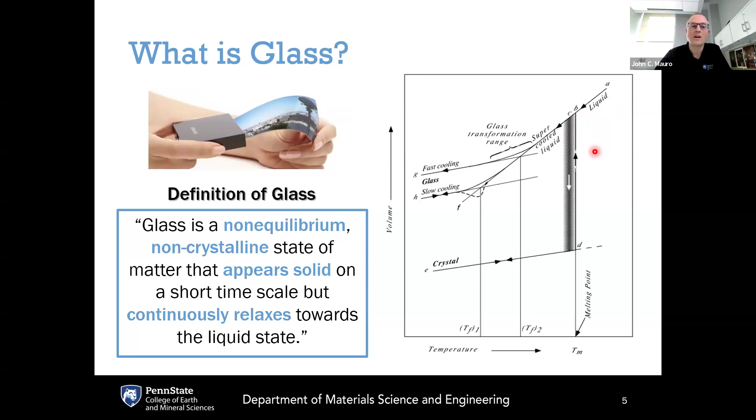In principle, any liquid could form a glass if you cool it fast enough to avoid crystallization. That's really the key thing.

When we think about typical glass products and their strengths, they range by orders of magnitude. Common glass products like glass jars have typical practical strengths on the order of 14 to 70 megapascals. Freshly drawn glass rods can be higher, 70 to 140 megapascals, but if they're abraded, their strength immediately goes down to about 14 to 35 megapascal. Armored glass can be up to several hundred megapascals, and glass fibers even higher. A freshly drawn glass fiber can be as high as 2 gigapascals.

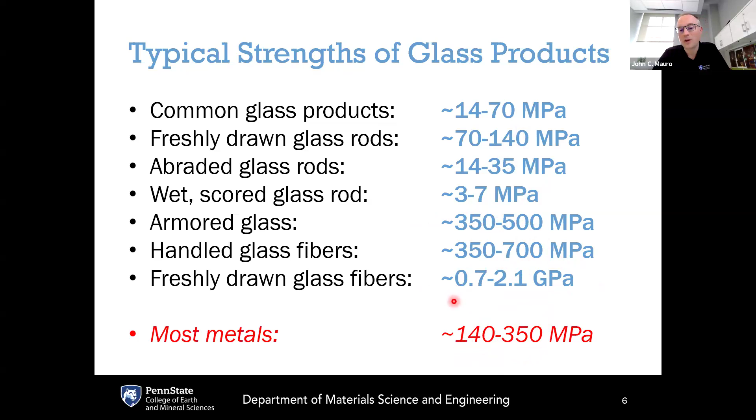If we compare these ranges to typical metals, which are on the order of 140 to 350 megapascals, glass is actually capable of being quite a bit stronger than most metals, but at the same time many of the glasses we commonly observe are actually weaker than many metals. The reason for this is the existence of flaws.

Going back to the original derivation by Orowan of the theoretical strength of a perfect brittle material like glass, this calculation is done based on not having any flaws and just calculating how much energy it would take to break bonds to form new fracture surfaces. If you put in typical values for a silicate glass, the theoretical strength of this perfect brittle solid would be about 35 gigapascals, much higher than what is observed even for freshly drawn glass fiber.

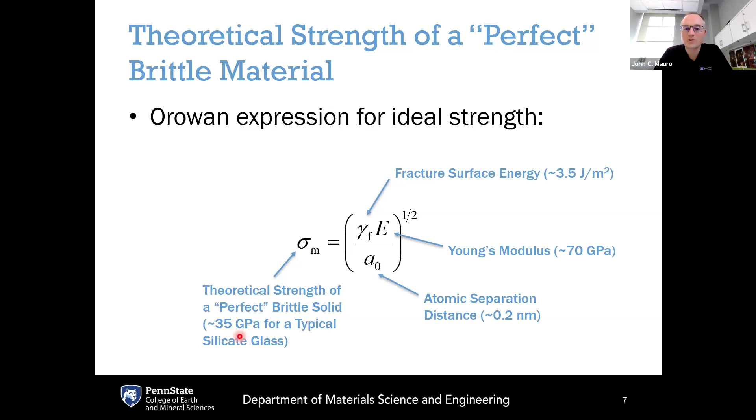What compromises the strength of glass is the presence of flaws. These can be flaws due to the manufacturing process, but more commonly they are flaws due to the handling of the glass products.

The original theory for incorporating flaws into the strength of a brittle material was done by Inglis. He considered what happens if there's an elliptical shaped flaw in the interior of the brittle material — for example, an elliptical flaw with certain dimensions, placed in uniaxial tension with an applied force. Inglis calculated how much this would compromise the strength.

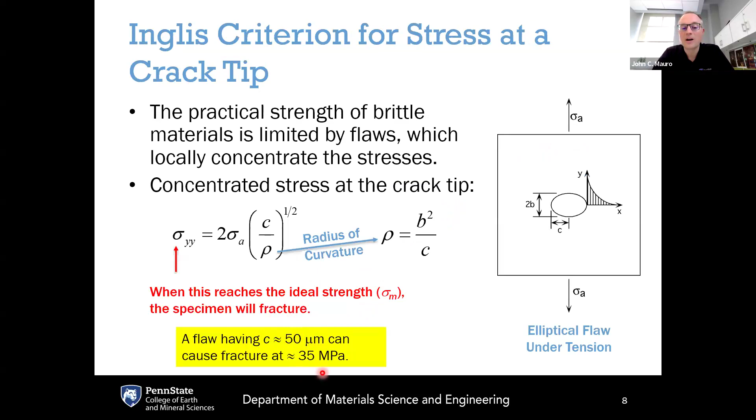If you take a perfect brittle solid with an ideal strength on the order of 35 gigapascals and introduce a flaw on the order of 50 microns, this can actually lead to fracture at a dramatically reduced strength of about 35 megapascals.

The more common way of thinking about the reduction of strength of brittle materials is due to Griffith, because Griffith introduced the presence of surface flaws. Surfaces of glasses or other brittle materials are what get exposed to the environment — this is where we touch the glass, and this is where it tends to undergo the greatest amount of damage.

With Griffith's analysis, he based it on the length of the crack as well as the sharpness of the crack tip — this appears in the denominator as the square root of pi times c star, where c star is the critical crack length needed to induce fracture in a material.

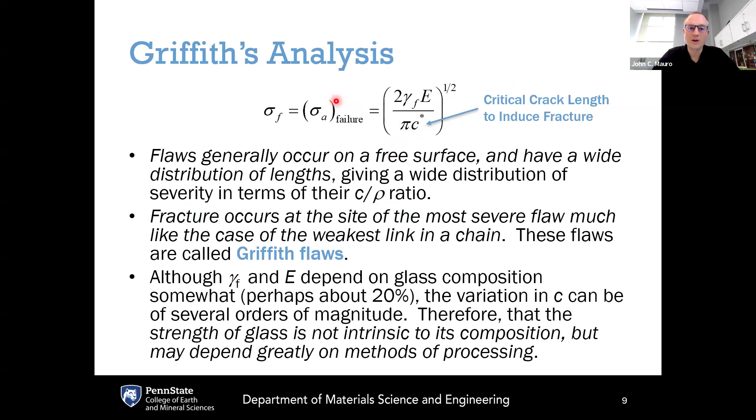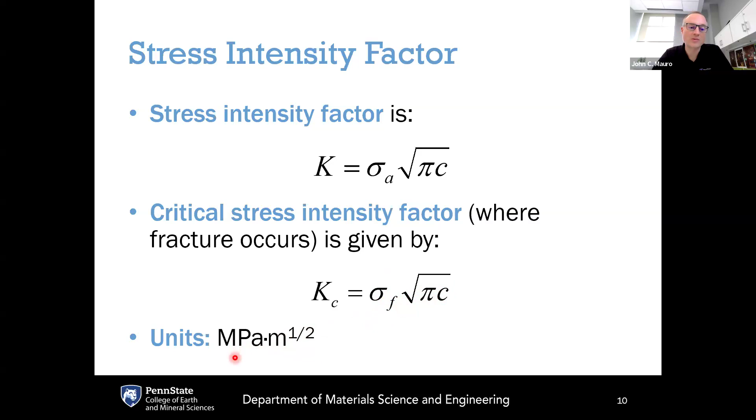If you take this square root of pi times c star and multiply it by the applied stress, you get what's called the stress intensity factor, K, introduced by Griffith. The critical stress intensity factor, denoted K sub C, is where fracture occurs, given by the stress at fracture, sigma sub F, times the square root of pi C, where C is the length of the surface flaw. The stress intensity factor has units of stress times the square root of distance, typically expressed as megapascals times square root of meters.

The failure of the glass or brittle material can occur in different modes.

Traditionally, there are three different modes that are defined. The so-called mode 1, or opening mode, is when you have a flaw as shown here and place this under uniaxial tension, opening the crack. When mode 1 failure occurs, there is a subscript of Roman numeral 1, so this is K1. There's also K2, due to mode 2 failure, which is a sliding mode.

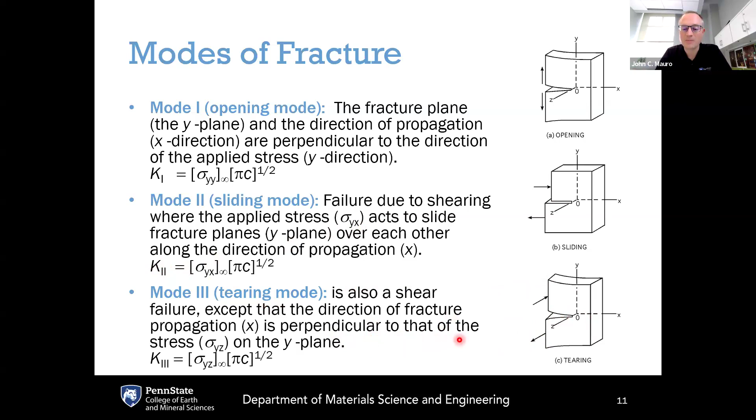This occurs if you place the material under shear, parallel with the plane formed by the fracture surface, resulting in mode 2 or sliding mode failure. In that case, the stress intensity factor has the subscript 2. There's also mode 3, tearing mode, shown in the lower right, where shear acts in a direction perpendicular to that of the stress on the plane. So we can have mode 1, mode 2, and mode 3 failure.

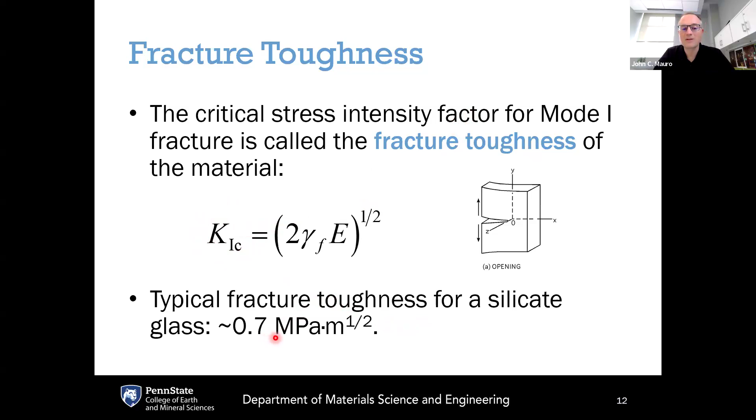What you most commonly see is K1C, the critical stress intensity factor under mode 1 of failure. This is more commonly known as the fracture toughness of the material. So if you see toughness quoted, that is K1C. For typical silicate glasses, fracture toughness is on the order of 0.7 megapascals times the square root of meters. A few other things to keep in mind for the mechanical properties of glasses, especially under many years of operation, is stress-assisted corrosion, or slow crack growth.

For silicate glasses, this is governed by interaction between water molecules from the environment and the crack tip itself. Water molecules can come in from rain or humidity. They enter the tip of the crack, which is under stress, and react with the silicate molecules at the crack tip. When a water molecule interacts with silica, it breaks one of the bonds, and the crack becomes one molecular unit longer. Over time, water can propagate to the crack tips, react with them, and continue to lengthen them.

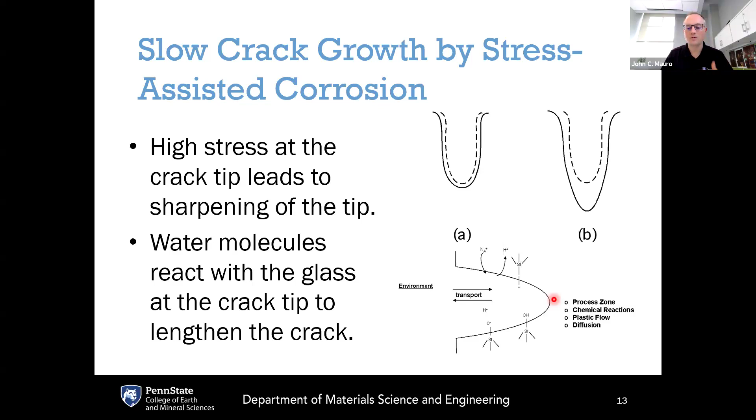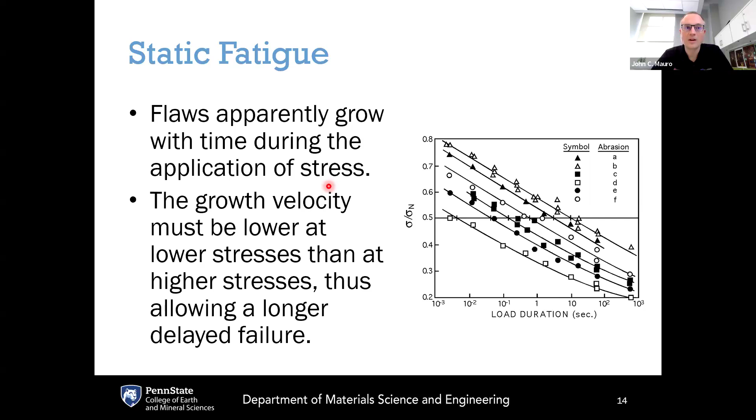This, over time, will compromise the strength of glass products. If this occurs while the glass is under constant stress or constant loading conditions, this is called static fatigue, where flaws grow over time due to application of stress. Over time, the strength of the material is compromised because of the reaction with water and the progressively lengthened crack tip.

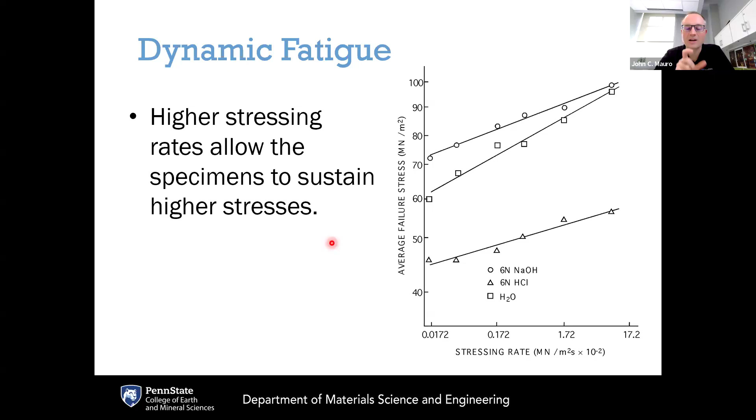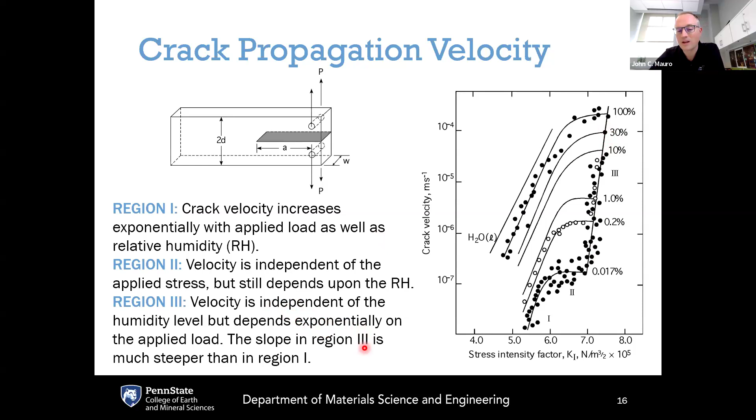Once the crack is long enough, we get to region 3, where there's a very sharp increase in crack velocity with stress intensity factor. At this point, the stress intensity factor is high enough that it doesn't need water molecules anymore to grow the crack. So the velocity is independent of humidity level, but still depends exponentially on the applied load, and at that point, that's where you generally have complete failure of the material.

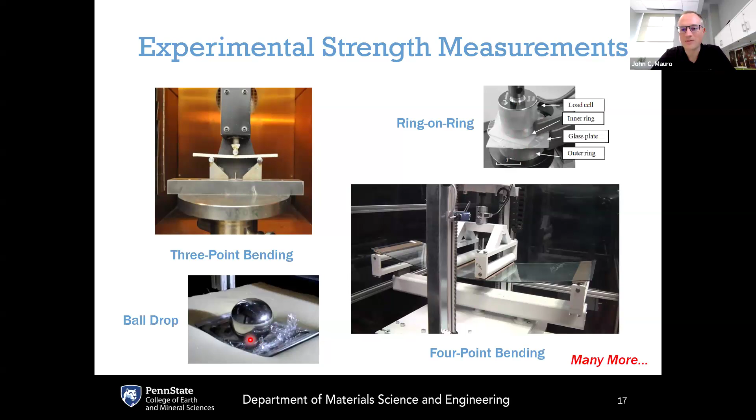There may be other specific tests to align with certain specific applications, but these are some of the common tests that are done. So now that we know that glasses fail due to brittle fracture, we know that it's governed by the distribution of the sizes of the cracks, and we know that the strength of glasses can be compromised by the reaction with water.

How can we actually improve the glass strength and toughness? There are several different ways to do that. One is to reduce the severity of the flaws. So how do we reduce the stress intensity factor K1? Another way would be having a coating to reduce the risk of surface damage, aiming to reduce the crack length, C.

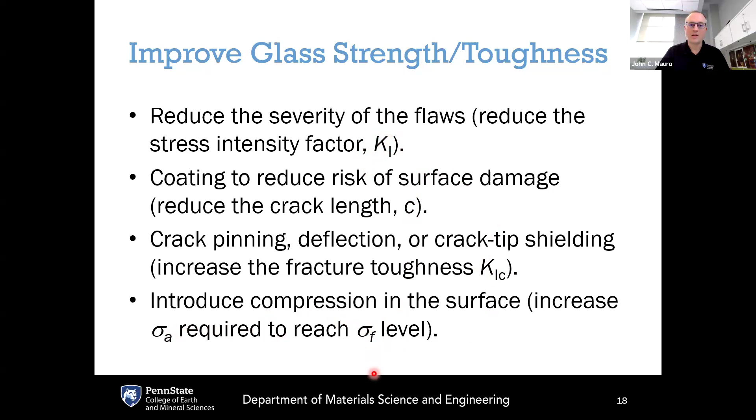Another would be, how could we increase the fracture toughness? How could we increase the K1C of the material by crack pinning, deflection, or crack tip shielding? Or could we introduce some sort of compressive stress at the surface to increase the applied stress that's required to reach the sigma F level? So in other words, could we reduce K1, increase K1C, reduce C, or increase sigma F? All of these are pathways to improving the mechanical performance of the glass. How do we actually do that?

One common way is thermal tempering. Thermal tempering is where you take thick, flat pieces of glass, subject it to fast cooling where you can freeze in the exterior surfaces of the glass faster than the interior part of the glass. This pulls the exterior into compression. This has the advantage that it's fast. You get really thick compressive stress layers, but you really can't do this with thin glass, and you can't do it with complex shapes, and it also requires glass with a high thermal expansion coefficient, like soda-lime silicate glass.

Chemical tempering or ion exchange has a number of advantages. This can be done on thin glass, like this is what's used in all your cell phone glass. It can be used for complex shapes. You can get much higher compressive stresses compared to thermal tempering. The disadvantage is that it's a slow process, and that means it's an expensive process. It takes on the order of 8 to 10 hours.

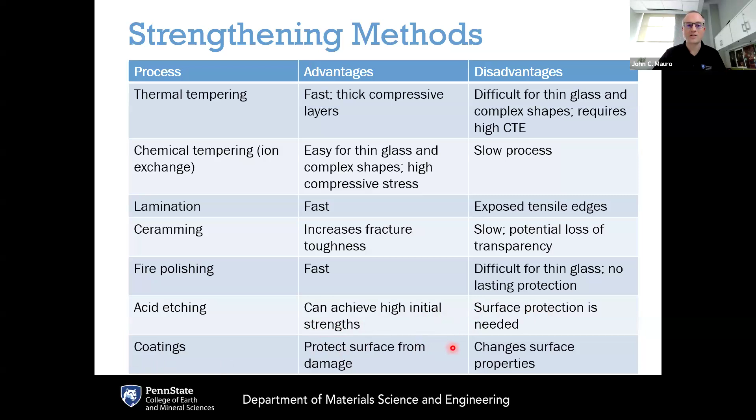Lamination can also be used. Ceramming is another pathway where you could turn the glass into glass ceramic to increase the fracture toughness, but you can compromise some of the optical properties that way. Fire polishing is a fast way to help reduce the severity of flaws on the surface, but it doesn't provide any additional lasting protection after that. Likewise, acid etching can reduce the severity of flaws, at least initially, but there's no protection later on. Coatings can also be used to provide longer-term protection, but that could also compromise some of the surface properties and the optical properties of the material.

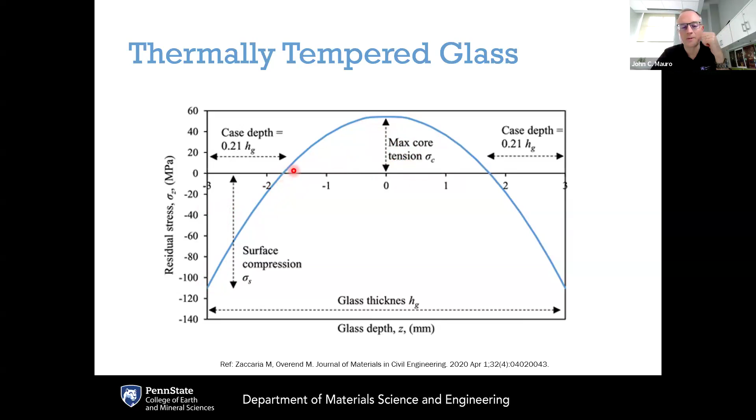Basically, you're safe as long as the cracks do not penetrate through the compressive layer to get through this depth of layer and into the tensile layer. You can have glass fracture following different patterns depending upon stresses that get released. If you have a non-tempered glass like an annealed glass, the cracks will propagate out in straight lines. So this is all the energy because of the initial impact, but the glass is not releasing any more tensile energy, and so you don't get any branching after the initial impact.

With tempered glass, on the other hand, if the crack penetrates through this depth of layer and into this tensile regime, now the glass wants to release all of this tensile energy. The tensile energy release causes the crack to accelerate until it hits the terminal velocity, which is governed by the speed of sound in the glass. At that point, it still wants to release energy at a faster rate, but it's unable to travel any faster. So the way to do that is to bifurcate the crack, so one crack splits into two cracks.

They continue to release the tensile energy, continue to accelerate until they reach their terminal velocity, and then they will branch again. As a result, the pattern that you get from tempered glass failure is these very small shards, and this is what's called frangibility. This is because of the release of tensile energy.

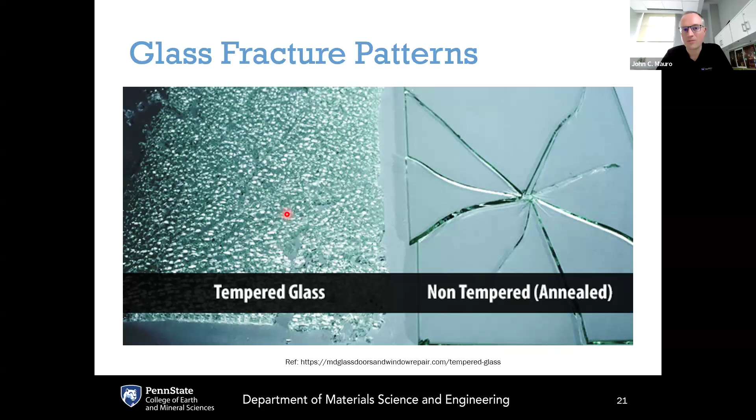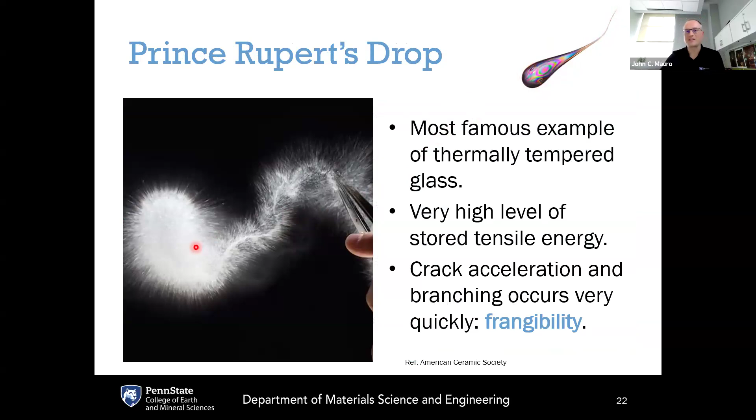The most famous example of this is the Prince Rupert's drop. This is an extreme example of thermal tempering, where it's extremely strong in the main part, but if you clip the tail, this will basically go into dust upon fracture because of the very high levels of tensile energy.

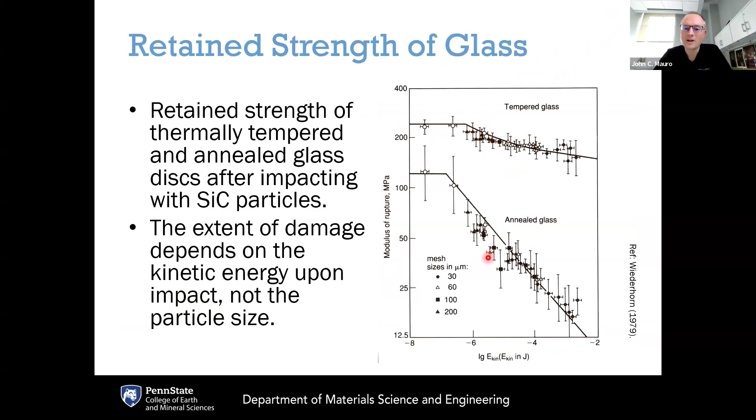Tempered glass is very effective at improving the practical strength of glass. This shows the practical strength of tempered glass versus annealed glass, where you can see some major advantages.

Very quickly, another approach for improving the strength is through laminated glass. The most common way of doing this would be like in an automotive windshield, where you've got a polymer layer in between two glass layers.

But another common way is actually a glass laminate. You probably have some of these dishes at home, these Corelle dishes. These are just laminated glasses. There's an interior glass, which is white, and this is coated by a very thin, clear glass layer. What gives these dishes their strength is the difference in the thermal expansion coefficient between the outer layer and the inner layer. This can also be done in flat glass forms.

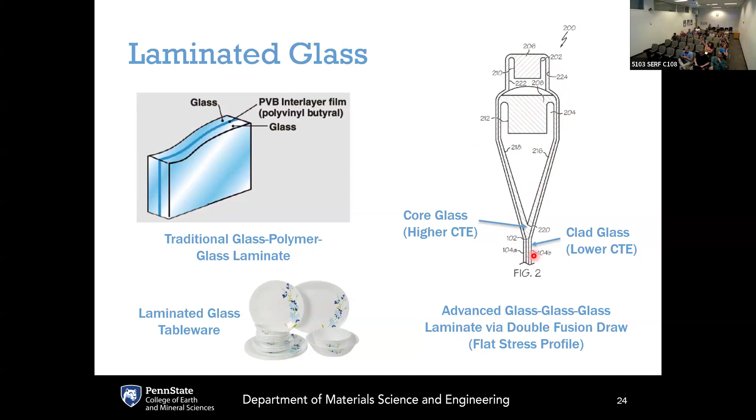In fact, one of the projects I worked on for a number of years at Corning was this double fusion draw process, where you've got one glass that's being melted up above, another glass down below. The upper glass flows over the inner glass, and what you get is a 3-layer laminate at the bottom that automatically gives you strengthening based on the differential in the CTEs between the clad glass and the core glass.

Toughening due to glass ceramics is basically growing crystals in order to deflect cracks. This is a very effective way to improve fracture toughness. This is what makes Corningware work, for example.

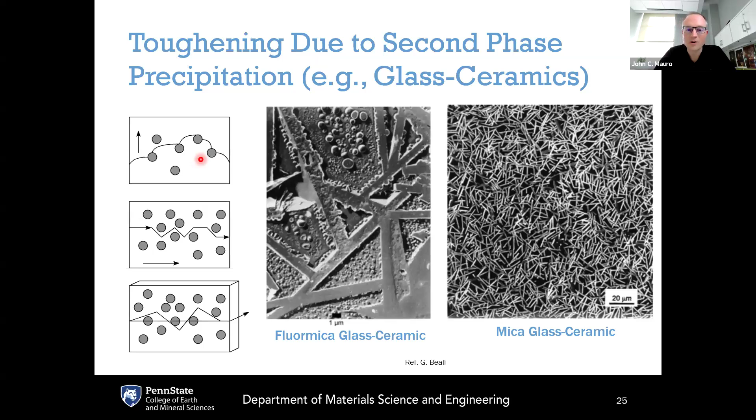And of course, we have ion exchange. Ion exchange gives you the highest level of compressive stress. This involves taking the glass, submerging it in a molten salt bath at a temperature of about 400 degrees C. What happens is that the smaller ions from the glass, like sodium, will diffuse out into the salt bath. They get replaced by larger ions like potassium from the salt bath.

The larger ions want to expand the glass surface, but they're unable to because the interior of the glass is keeping them within a certain geometry. So this concentration profile of potassium gets converted into a strain profile, which gets converted into a stress profile. This gives stresses on the order of about 1 gigapascal, much higher than thermal tempering.

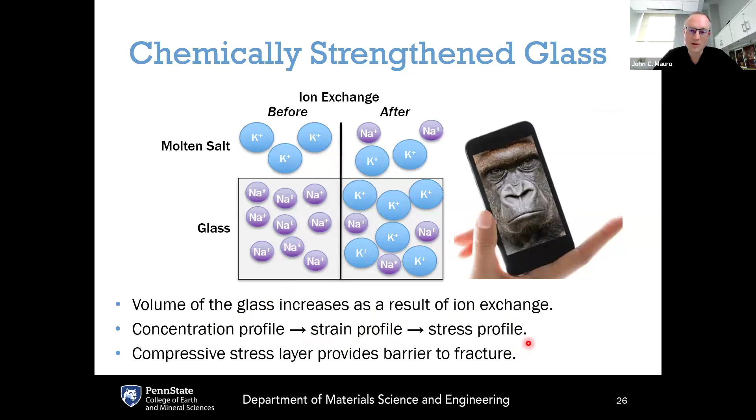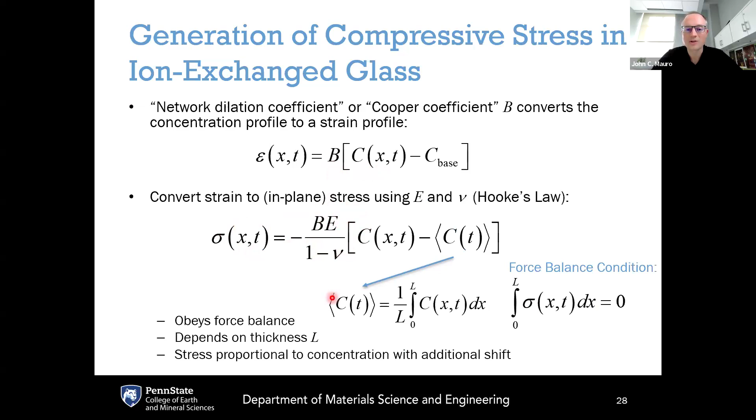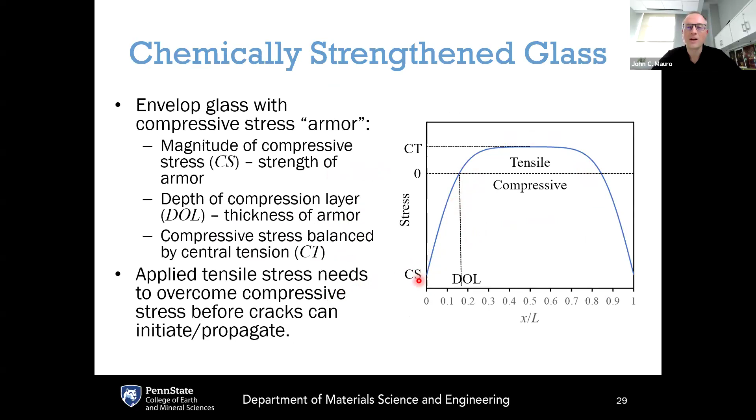That strain gets converted into a stress profile by multiplying by the Young's modulus over 1 minus the Poisson's ratio. So you get a profile that looks kind of similar to the shape we had with thermal tempering, except you tend to have a lower depth of layer and a higher compressive stress. So it gives you more strength to your armor, but the armor isn't quite as thick compared to thermal tempering.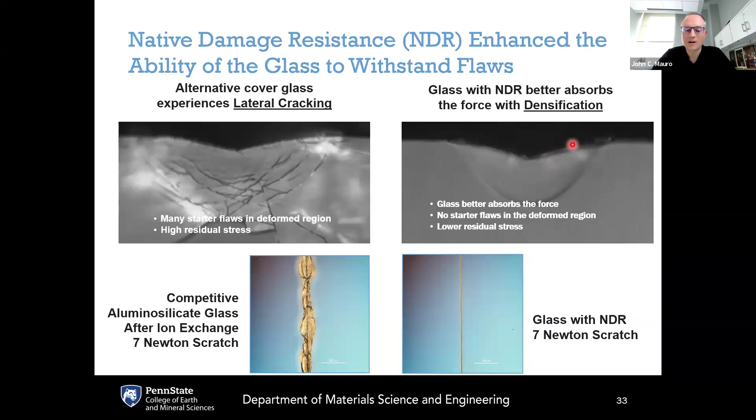So if you want to learn more, I've got a couple of books: our glass book, Fundamentals of Inorganic Glasses, and the Kinetics book, Materials Kinetics.

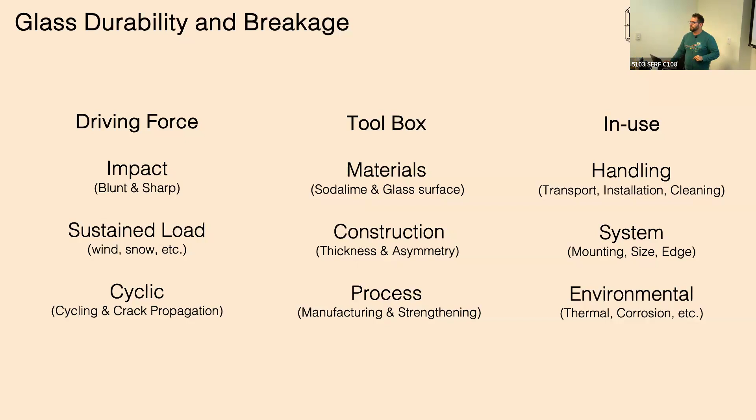I gave this sort of talk as far as like you get the simpleton version, but I've spent most of my life on the scale of processing and manufacturing. So all the things we do to screw up the strength of glass that John just talked about, and to make a part. I'm going to focus my talk today primarily on the toolbox in the middle versus the driving force and in-use handling stuff and lamination side of things, mainly just on speed, as well as to give the team enough time for asking questions.

So rolled glass, to start with, you take the soda lime silicate that is used in PV glass today, melt down the sand, and they literally put it through two or three rollers to put the pattern into the glass. So you go from a melt touching the surface of metal, and then it comes out as patterned glass. Pattern glass was invented before the float process, before the fusion process, to make even sheets of glass. It's ubiquitous in the PV industry. There's people who do float glass and make modules, as well as thin film technology. But from the crystalline world, pattern soda lime glass is the tool we're using right now.

And there you have composition, thickness, and surface quality that I'll chat through. Then float and drawn glasses are other mass manufacturing techniques - float being primarily used in architectural and automotive, and then drawn glasses, like in your cell phone, more of a pure glass surface. Any of these topics we can dive more deep into for timing.

For edge and profile, you take glass done in sort of blocks or mother sheets - this long continuous giant sheet of glass. You then take it and scribe and break it into smaller pieces, and then do an edge profile grind to make your profile or edge profile. That's done with a grinding wheel, and there's no sexy version of it - the glass goes through and you're literally grinding the profile. So we'll go through the edge conditions, but if you want a circular or bullnose edge, your grinding wheel looks like this. If you want a bevel, your grinding wheel looks like that, and you literally grind that edge into the surface. But there you have profile, perimeter shape - that'll talk a little bit around corners, and then process control around how often do you change out your grinding wheels, how obsessive are you around edge quality shipping.

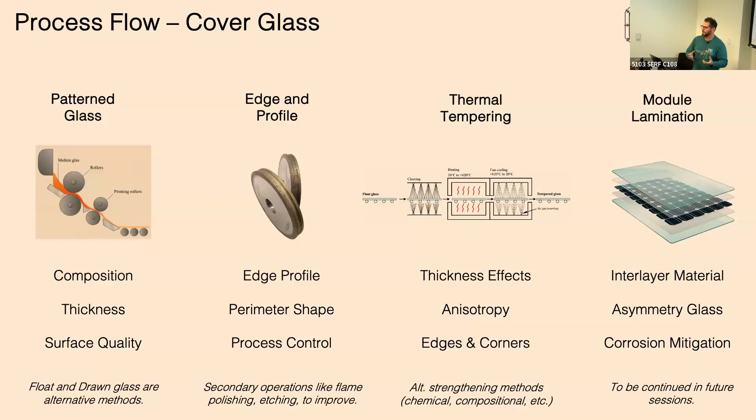Within rolled glass - my research tends to be YouTube videos, early morning YouTube videos. There's a great YouTube 'how it's made' on pattern glass, so if you want to watch it, the link's there. You go through melting it down, and you'll see how quickly it goes from the molten state through metal pieces that imprint the pattern onto the backside of your glass. There are these little dots that I'm still searching for a reason why they're there, just to be honest.

But it does create that sort of structural glass that's in there. If you look at patterned shower glass or architectural glass, it will tend to go through this patterning process - embossing too, if you have leathers or papers, similar type of process. It then gets cooled down and made into mother sheets, but worth a watch because it gives you a sense of this from a glass perspective - hitting metal that quickly is just scary.

You're cooling it down really fast, inducing a bunch of interactions between the metal drum imparting your rollers and the glass surface. So from a surface quality perspective, the best glass you can make - like when John was explaining the fusion drawn process - is if it can just hit air and cool down on its own, you get a perfect surface. If you touch it with anything - rollers, float, tin - you're going to impart damage onto the surface of the glass. This is teeny damage, not visual damage, just little teeny flaws in the surface. But the reason it's used - why are you using it? - is just that it's pretty easy to industrialize, a fairly cheap process to make.

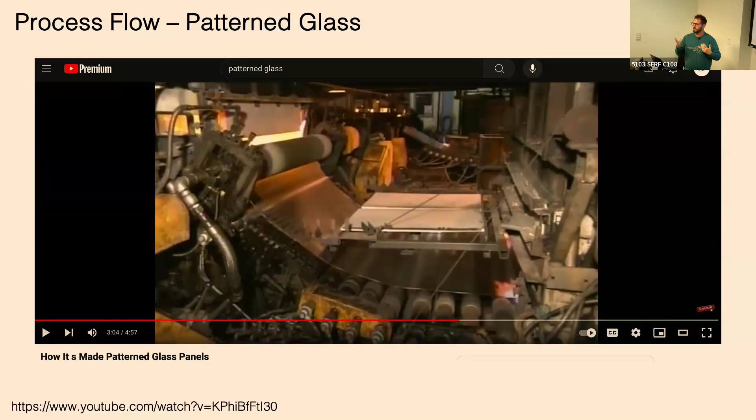You can become a glassmaker really easily this way versus building a float plant or doing a fusion drawn plant.

Here's the breakdown, starting with my cartoons here. You start off with a big mother sheet or block of glass, then you take a diamond, typically a diamond scribe, scribe a line, and snap a piece of glass into the fairly rough geometry of an XY piece. Then you edge grind and profile it - if you're going to put on a pencil edge or a beveled edge, it'll go through that process to create the final perimeter shape.

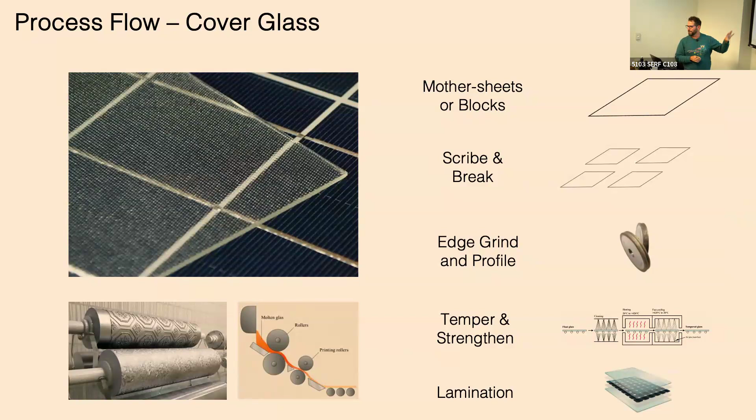You go to thermal tempering or strengthening and then lamination. There are decorative rolls done in glass too, to give you a sense - it's the same type of process. It just becomes more like on solar glass, where you'll have little teeny bumps on that roller.

Looking at edge profile - again this is a quick snapshot of what I prepared for this - there's a whole bunch of other edge profiles out there. The most common in architectural is this sort of knocked-off edge, a polished small chamfer. If you see any architectural exposed glass edges, you'll tend to see this edge profile, typically polished for aesthetic reasons and some strength. The grinding wheel there works in a linear fashion.

You can see in those grinding wheels, the glass goes through and hits a bunch of different grinding wheels that put in the profile you're looking for. There's also the pencil edge - you'll hear it called bull nose - basically a big rounded edge, which is the strongest edge because you're not putting that glass in tension and you're avoiding any sharp corners.

Things to watch out for: the grinding wheel is also wearing away at the same time. How well your glass is attuned to the grinding wheel - if it's up high or down low - you can get chips on that surface right at the transition from the flat to the edge. You tend to get radial chips there - little teeny marks, like a scratch, similar to what John showed, where you'll see little digs that look like a rabbit ate your side, visible under a microscope.

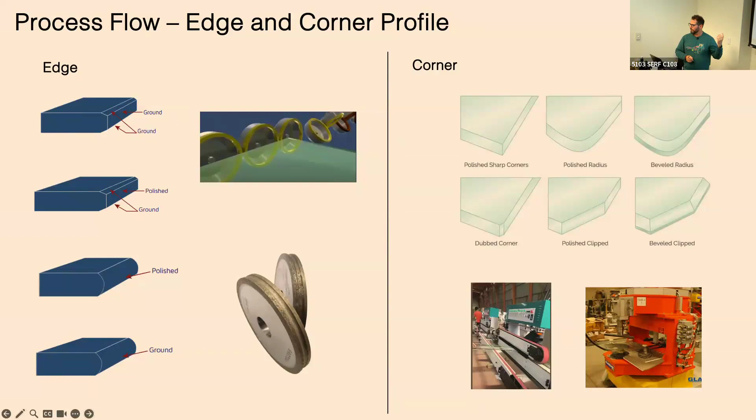Things to watch out for if you audit your supply chain, or dive in deep with people making solar modules — it's probably more about a feedback loop. A lot of this is optical inspection; people look at the glass to see if it's okay, put under a backlight. But there are other quantitative techniques you can look at too.

With the drive from 3.2 to 2.5 to 2 millimeters — the way thermal tempering works is you heat up the glass, freeze the surfaces, it shrinks in the middle, and pulls the surfaces into compression. You need a certain amount of thermal mass to pull the surfaces into compression, so when you freeze the surfaces it gets harder and harder to do. Your quench pressure has to go up and up to do it at thinner modules. This is why it doesn't work with thin glass, as John mentioned.

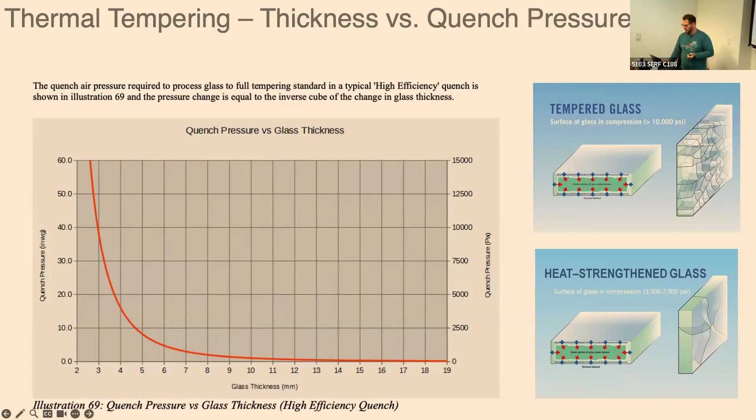Thermal tempering tends to be done at the bulk level, in the middle of the glass. You're tuning in to put a stress profile and a breakage pattern in the middle. But if you imagine cooling down a part, your surfaces and edges are also cooling at the same rate, and you get a ton of stuff going on around edges and corners. This is my comment that edges and corners need a little bit more love in a rectangular thing that has a lot of edges.

Also, if you put a hole in the back glass, when you go to thermally temper it, your stress profile is going to look bizarre around the hole. It means you have differential stresses, and that tends to be a place where glass is not so happy when it has a bunch of different areas bottled up.

There are a bunch of ways to measure this continuously with polarized light. This will be at the single glass stage, and it tends to be mostly in transmission. So if you do this before you laminate an opaque solar panel, this is probably the place to do it.

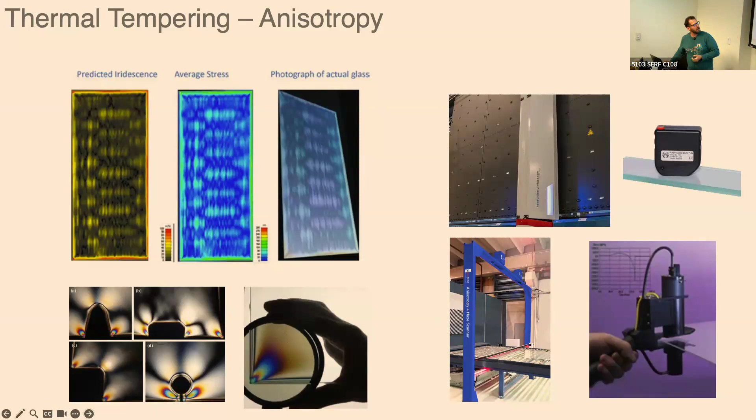The old school way they measure thermal tempering is by a breakage pattern. They take the piece of thermally tempered glass, put a sharp point, break it, then collect and weigh the fragments to see if it's tempered or not. That's the more traditional way to measure the stress profile, but online in a production environment, that tends to be the way it's done, with the operator tuning the pressure and quench pressure to give the right breakage pattern.

There's definitely an app for that. There's a couple of places where you take a picture and it can measure these areas. I'll put a link in the description, but it still takes breaking the glass to do it. And this, in my opinion, is a bulk measurement - it's taking center mass, you collect the things. It doesn't focus on the edges.

Now that beautiful stress profile with compressive stress on both sides and a central tension region - when you get to an edge, you likely don't have that beautiful stress profile because you're cooling all around that edge. The edge gets a lot of thermal energy cooling this way, so it drives in this area, and you tend to get this little keyhole looking thing at the edge of the glass.

This happens also in annealed glass. When that glass cools down in automotive, you get a bit of a tensile region around the perimeter, about 100 millimeters there in automotive. It's probably lower here, but it creates an area with lower compression inboard of your edge, which would be scary, and especially more scary when you go thinner, because you have less safety margin.

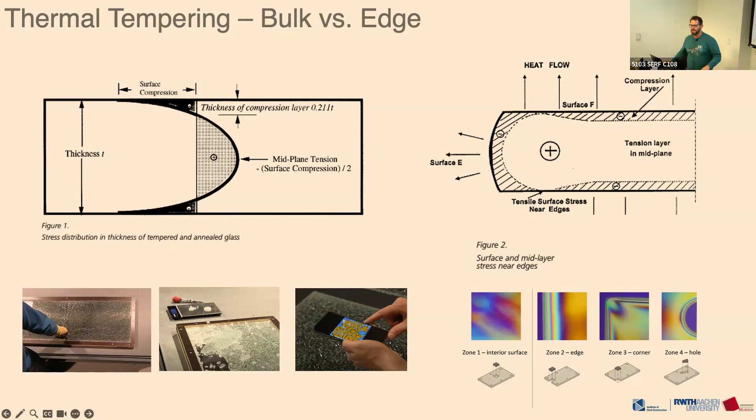This is based on these things. I think it's definitely modelable, in a way that modeling in thermal tempering hasn't gotten that much love, because in architectural glass it's thicker, 4 and 5 millimeters. Anybody can thermally temper it - it's really good, it's cheap, and it works. As you go thinner, science might need to take over a little more, pushing towards quantitative techniques, as well as other strengthening mechanisms that would be helpful.

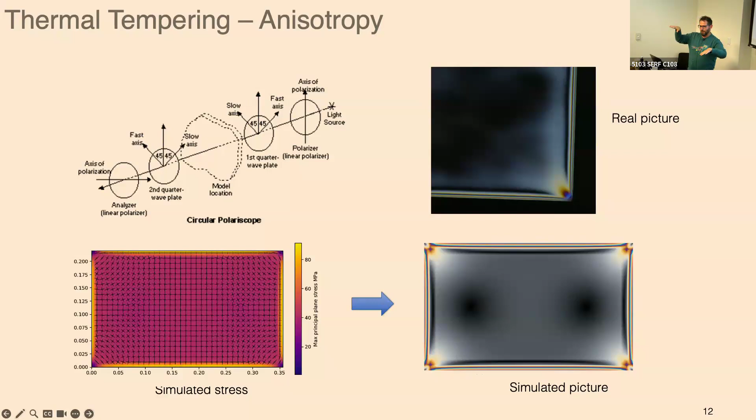But it's just sort of a picture - there is some work done, but then it comes off. If you look at annealed glass, you'll see high stress points, and especially as you get larger modules, this thing is shrinking, basically pulling in stresses. So you have inner stuff that keeps shrinking. The larger you go, the more distance you have, and it pulls this thing to the corners. Now, it's not pulling it so your module looks curved, but it's not happy - the corners are just not happy in that world.